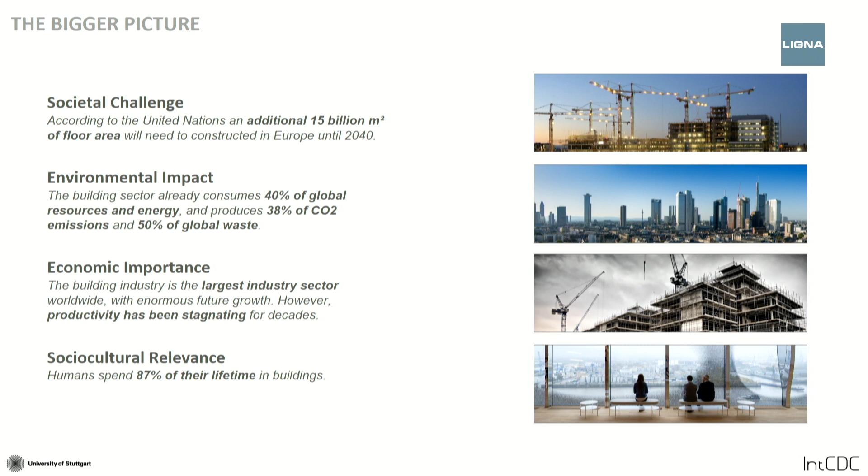In the end, when we talk about construction, we should keep in mind that we're building the world in which we actually live. In the Western world, we spend 87% of our lifetime in buildings. So those are the human artifacts that have the biggest influence on our quality of life, and of course also stay quite long with us. So we should take utmost care to design them with the best possible quality.

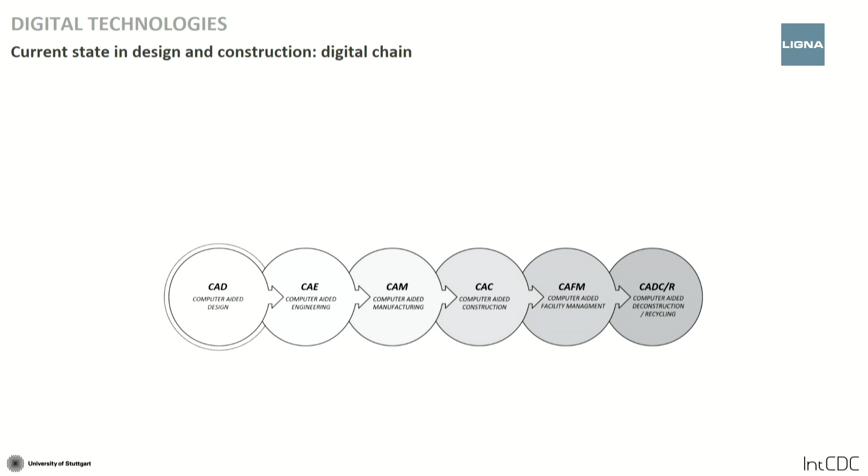Now, of course, timber construction can help address a lot of these challenges, especially if combined with digital technologies. So how do we deal with digital technologies right now? I think what we all aim at is a kind of digital chain. There's a lot of effort in making sure that data is passed on from one stage of design and construction to the next. But we also have to understand that we are digitalizing design and construction as we have done it in the past.

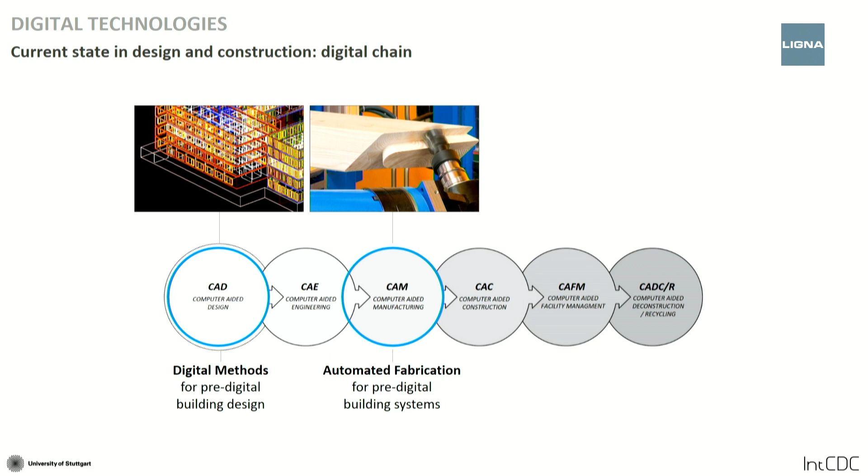If we look at the current digital methods, and of course they're really important, in the end they are digital methods for essentially pre-digital design approaches. Similarly, automated fabrication, and the timber sector is very advanced in this field, is automated fabrication for essentially pre-digital building systems. So one could conclude that the digitalization of pre-digital design and construction approaches means we may not fully tap into the potential of digital technologies. So what could be a way to achieve that in the future?

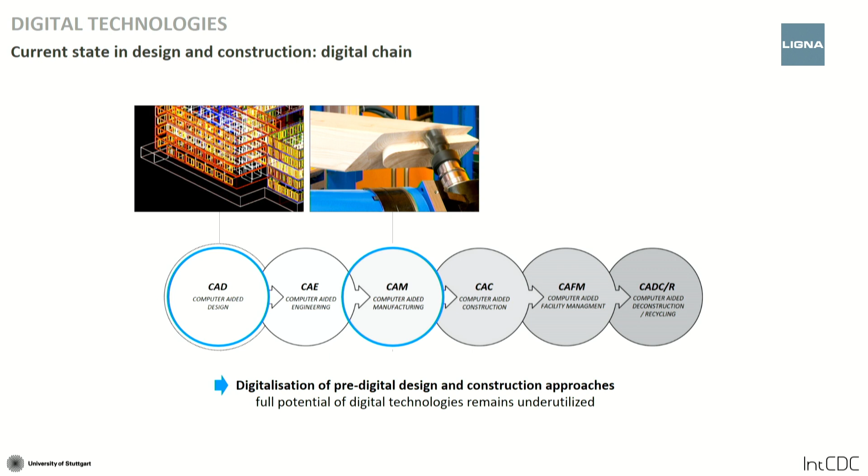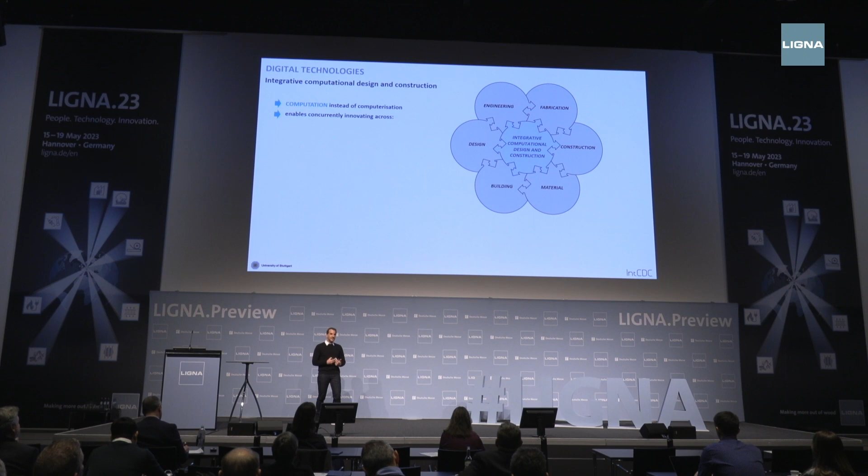This is exactly what we are investigating at the University of Stuttgart, where we think it's not so much about the computerization or digitalization of design and construction as we know it, but about how we deal with computation and artificial intelligence to think about genuinely digital timber construction, enabled by concurrently innovating across various different areas. I think we need to understand that the biggest potential in computation is integration.

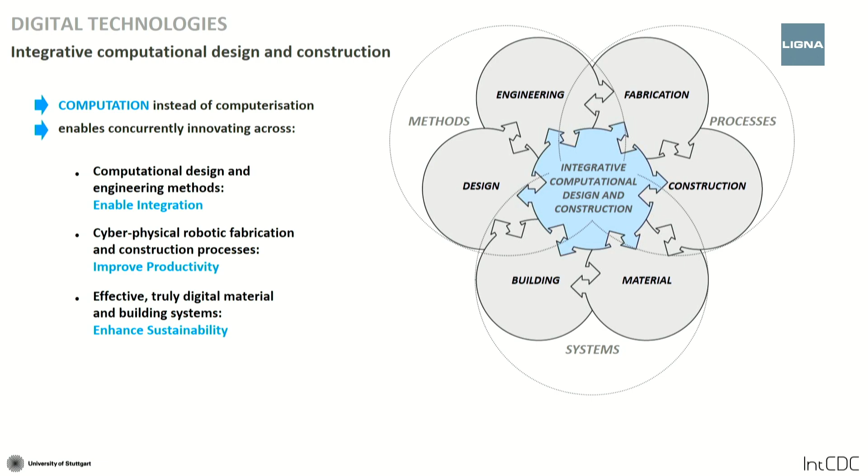The integration of computational design and engineering methods that enable this integration, cyber-physical robotic fabrication and construction processes to deal with the significant productivity challenge in construction, and then using that to develop effective, truly digital material and building systems that enhance sustainability. The most important aspect is that we do all this in feedback with each other, looking at it comprehensively and holistically rather than in the individual bubble. So integrative computation, design, and construction may allow tapping the full potential of digital technologies for truly future-proof construction.

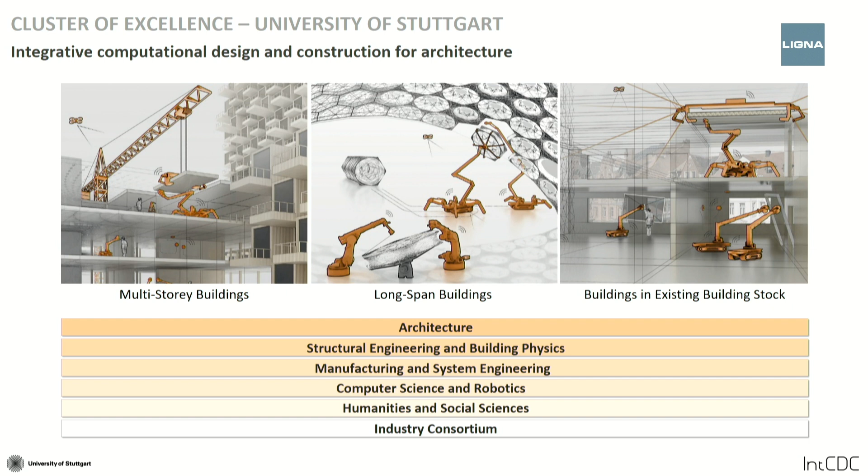And we have that coupled for two-directional knowledge transfer with a large industry consortium. We're trying to tackle these challenges for multi-story buildings, for long-span buildings, and for one aspect that is particularly relevant here in Europe, dealing with and building within the existing building stock.

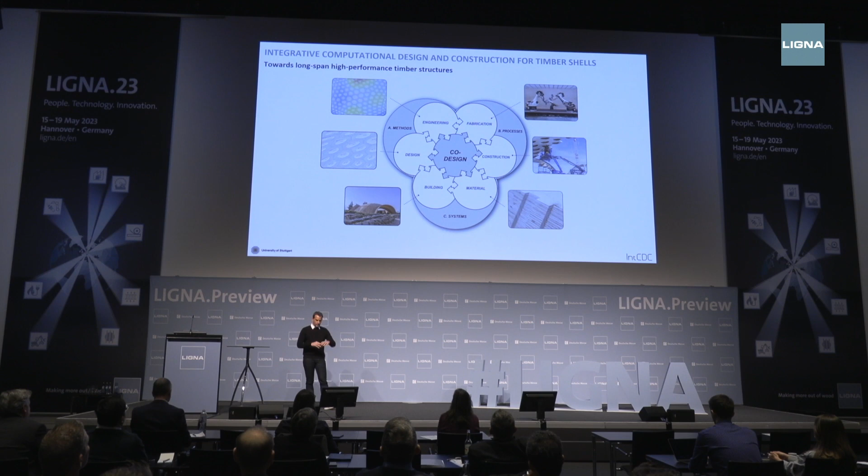So while this whole idea about integration may initially sound a bit academic, by the way, we call this overarching holistic methodology co-design, I thought it may be more interesting for you to just look at a few examples. How can it happen? Because it's already possible. And through that, it may become a bit more tangible.

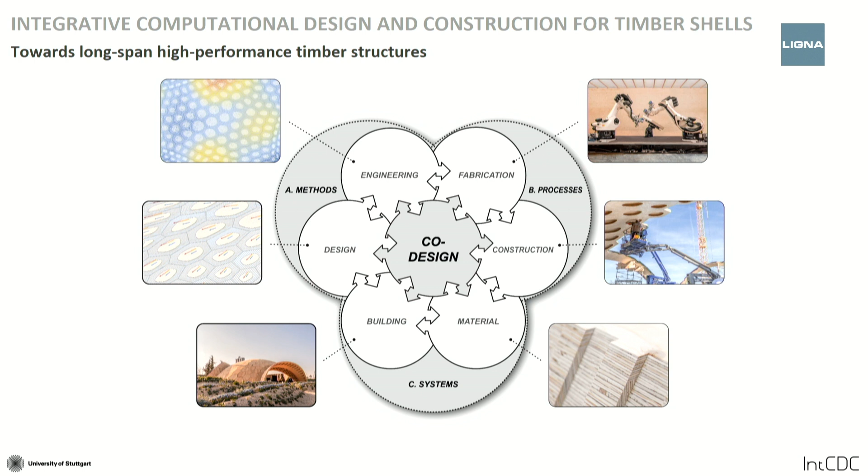So the first example I want to show you is how can we co-design or use integrative computation, design, and construction for high-performance timber structures. So buildings that actually use very little material to actually achieve high structural performance. And I will do this by showing you one of our demonstrator buildings, which is the BUGA Wood Pavilion.

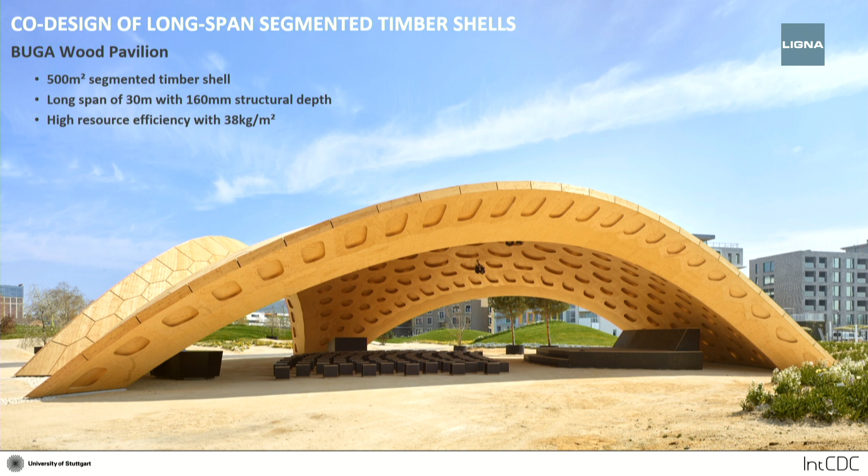It's around 500 square meter shell structure, has a clear span of 30 meters, but only a structural depth of 160 millimeters. So that means it just consumes 38 kilograms of wood per square meter. Everyone that knows what a cubic meter of wood costs, despite recent rises, knows that this is not an expensive building. How is that possible?

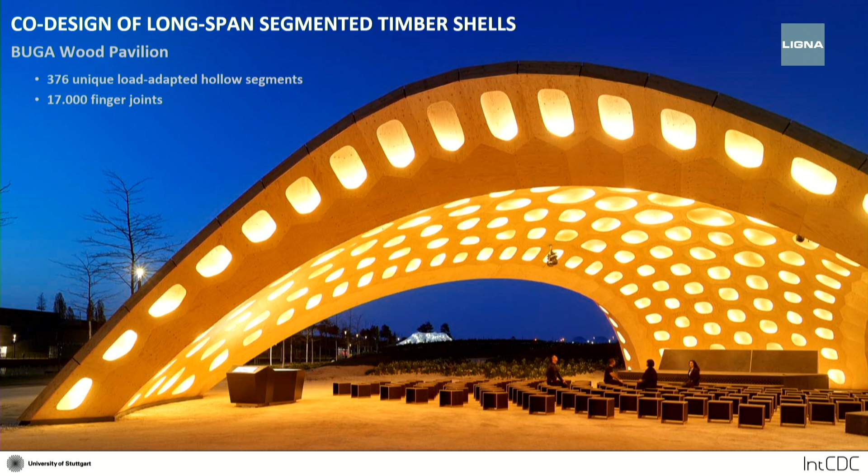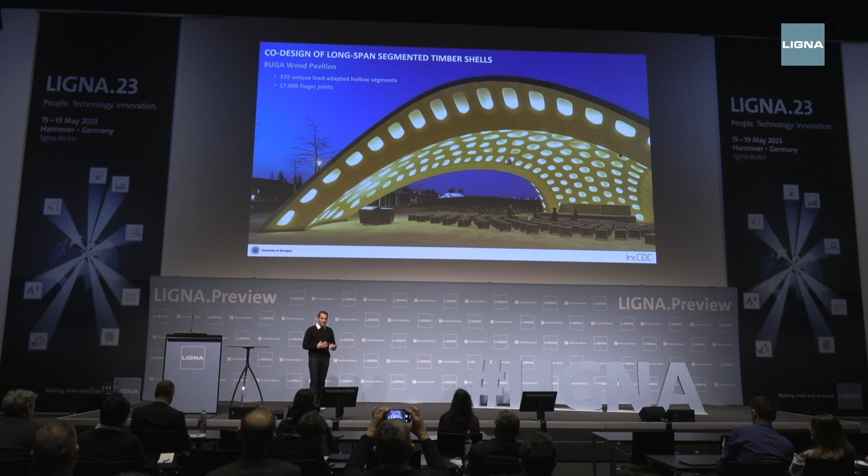It's possible because we tune every single part to be designed to exactly meet its performance requirement. So all the parts are different, because only with that level of differentiation you can get that level of performance. And that means here we're looking at almost 380 of those roof components that make up the shell, and they all have different joints, so it's a large number of different elements.

So here you can see how this whole structure is built up. It's actually made from individual pieces, and the pieces are again made from a lot of complex pieces that are all different. Overall, more than 20,000 different elements.

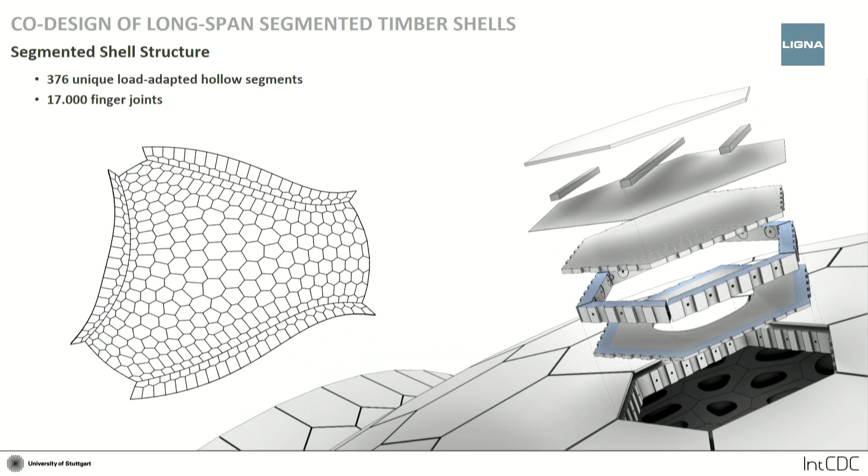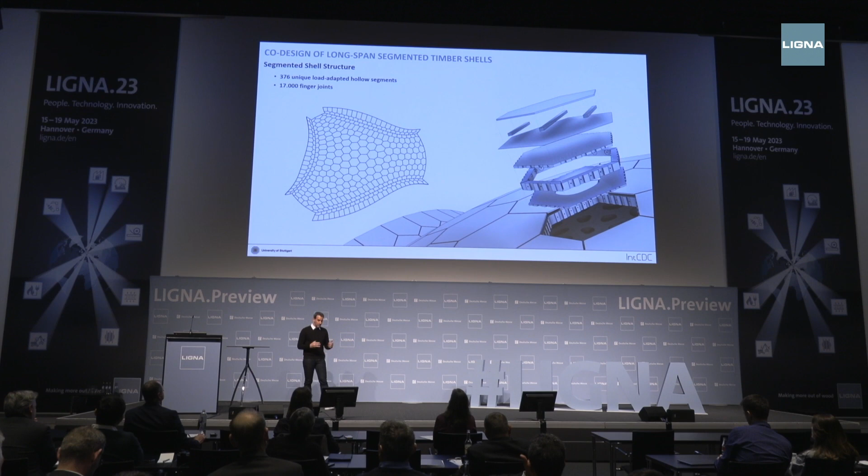And the interesting part is that this is a bit questioning the typical economy of construction. We're used to an economy of construction where the repetition of the same parts means that we may invest a bit more into the material, but on the other hand, it's cheaper to build. And I think in recent times we have experienced that all of a sudden energy and materials and labor become expensive. So we may actually look into ways of how we can reduce the consumption of energy and materials by having a higher level of complexity in the structures.

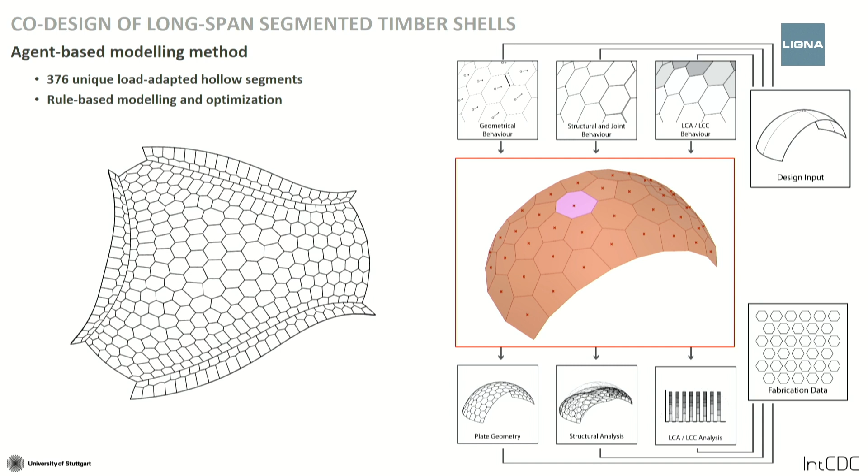That is possible through digital technologies, because we have developed algorithms that can deal with this individuality of the elements, so they all follow the same rule, but they're all different. And at any moment in time, we know what kind of impact they have economically and environmentally, because they're part of one integrative workflow. For this building, that means we don't model any of these parts.

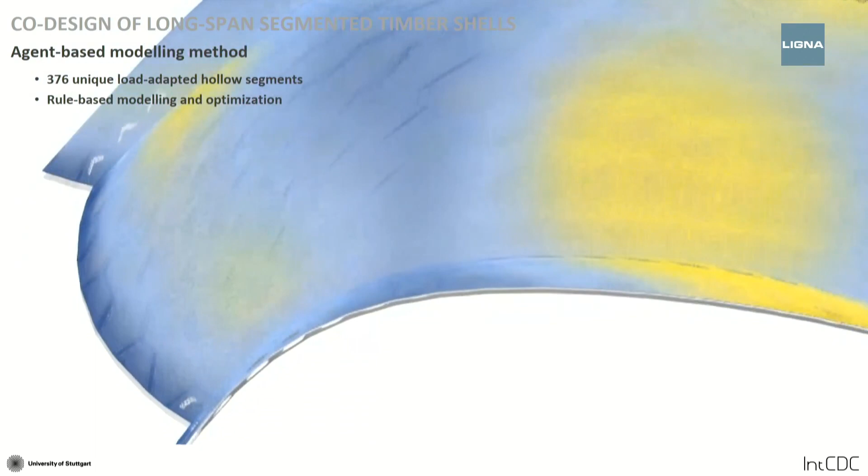They're actually generated, and in the generation, every single element is already included. So it's not different levels of details. Every bolt is in there from the beginning. And it's actually existing in the feedback with structural analysis, life cycle analysis, and all these aspects. And here you can see that the buildings follow rules how to find the location in which they perform best.

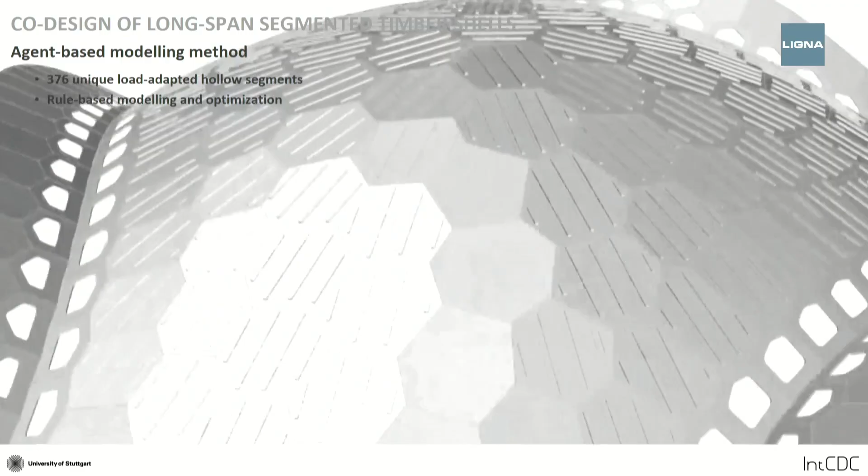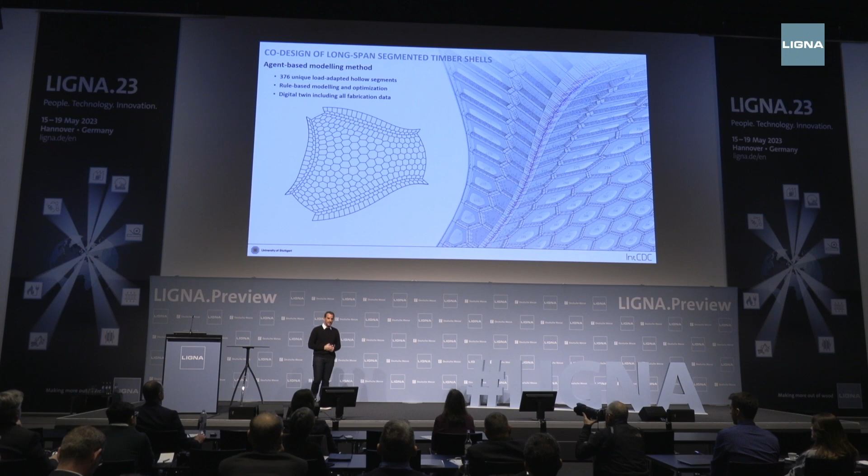That means we get for free a digital twin that includes also, of course, all fabrication data. In fact, what you see here, we don't need, really. That's just a geometric representation that we as architects feel quite dear to, but we could directly communicate from the algorithm to the machine. And for that, in order to really tap that potential, we also need to think about the co-design of the prefabrication process with the actual design methods.

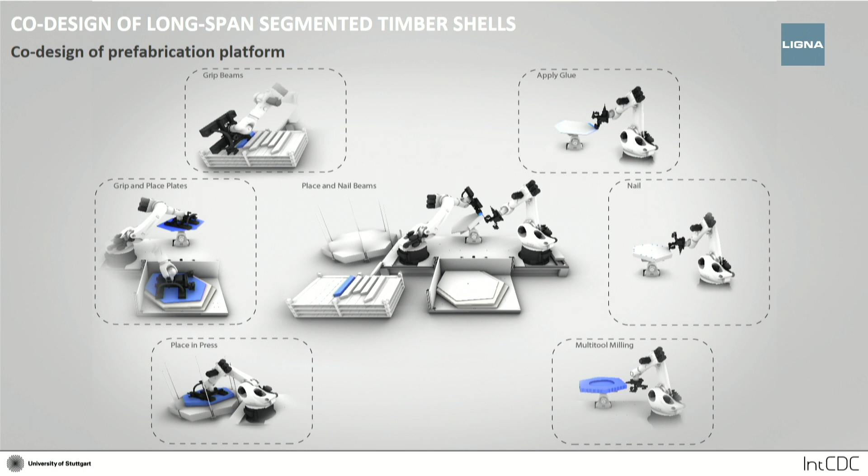So what we've developed for this project is to say, okay, we want to have one manufacturing unit that is designed with the building that just produces the building for us. And that's possible with an actually incredibly small footprint and also quite a low investment. So what we developed is this robotic fabrication platform that can produce the entire building, and it's incredibly compact. So it fits onto a 20-foot container.

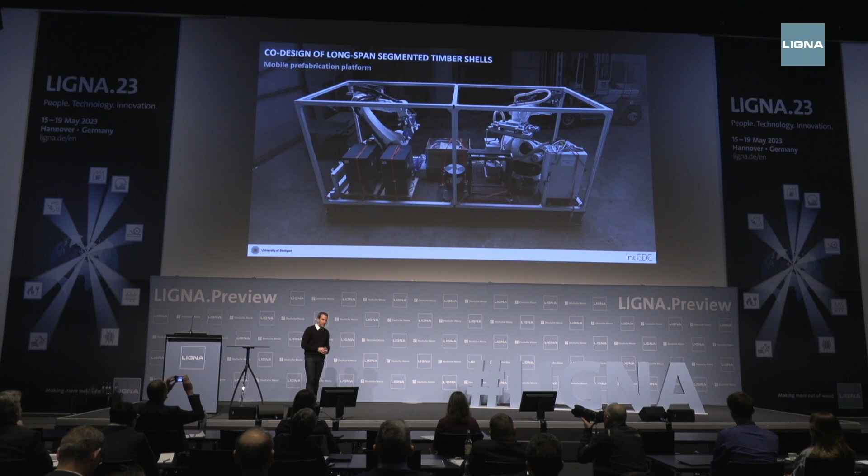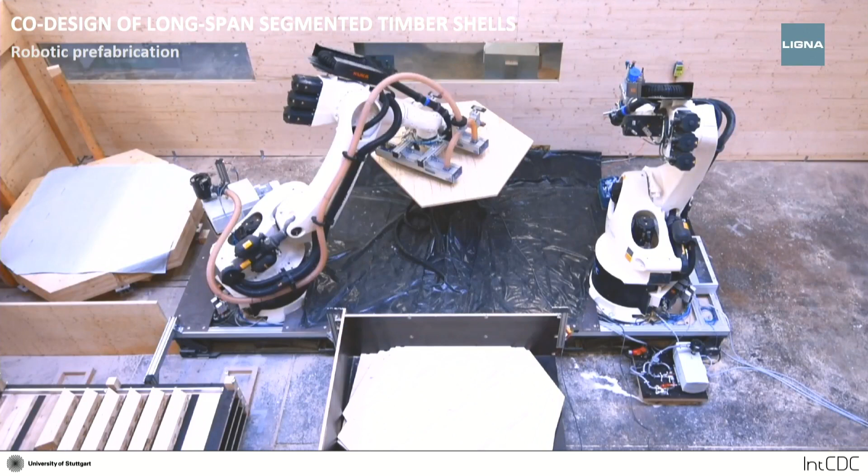It's actually mobile. It's registered as a container, so you can ship it anywhere on the back of a lorry or by ship, and it can produce everything. Here you can see the transportability, and we brought it to the site, actually to a local timber manufacturer, and it produces all the elements in a fully automated way. No prototype, by the way. First element ends up in the building. So how does that happen? I will explain the production process in a second.

So the robot picks the bottom plate, mounts it onto the turntable on a vacuum gripper, applies the glue, puts on the rim beam, secures the rim beam with wooden nails to make sure it remains fully monomaterial, then applies the glue on the top, adds the top plate, and puts it in the press. Takes about 7 minutes per element. Every element is different. Every component is different. It's all run with one control algorithm that can deal with this level of non-repeatability.

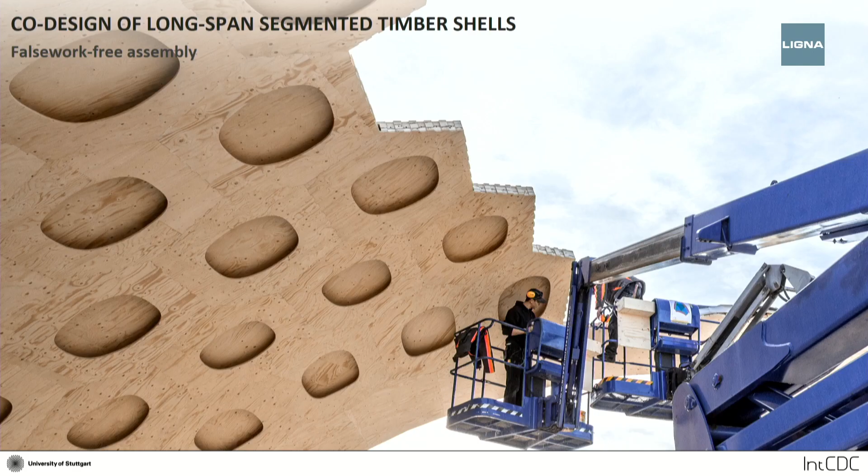And you get an incredibly high level of precision. So once these elements come back, they're actually milled on the same platform with an accuracy of 0.35 millimeters. And that's, of course, important because this extremely high level of precision means you can build up your system like a three-dimensional puzzle in space. No scaffolding, no falsework, none of all these other incredibly costly and labor-intense processes that are typically related to shell buildings, which meant actually that they disappeared from construction.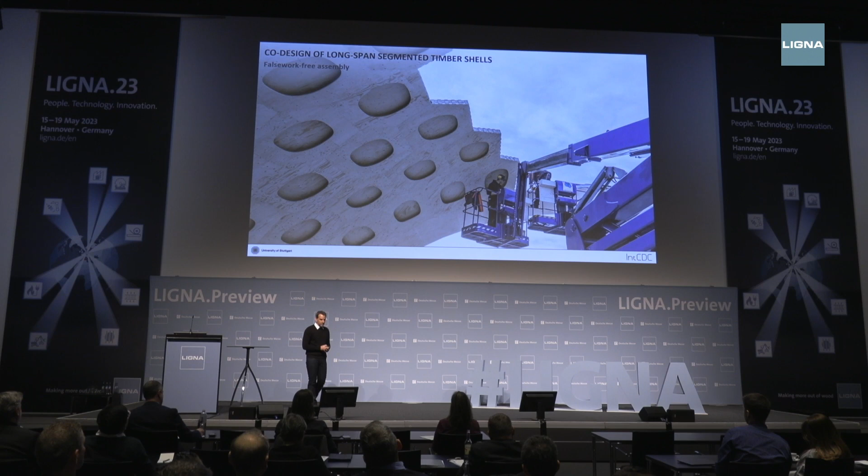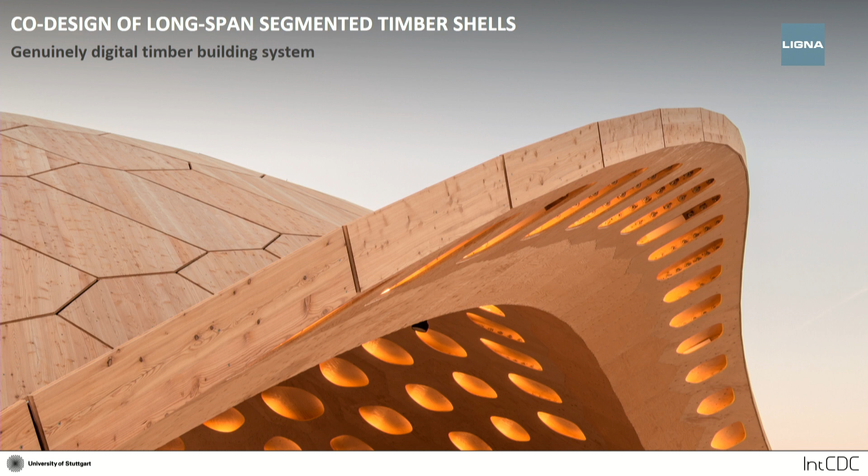And what is also important, of course, is that you have a different way of dealing with tolerances. There are none, and there cannot be any. So the last piece needs to fit. And it did. So I think what we are seeing here is a genuinely digital timber building system. That's why I wanted to show you this example.

It's something that couldn't have been designed, it couldn't have been built a few years ago, especially not in the incredibly strict timeline of this building. So this was actually contracted, delivered, and the building opened within 13 months, yeah? Including everything. The design and development of the robotic fab platform, the certification process that is required for robotic gluing, everything. So innovation is possible also on fast track.

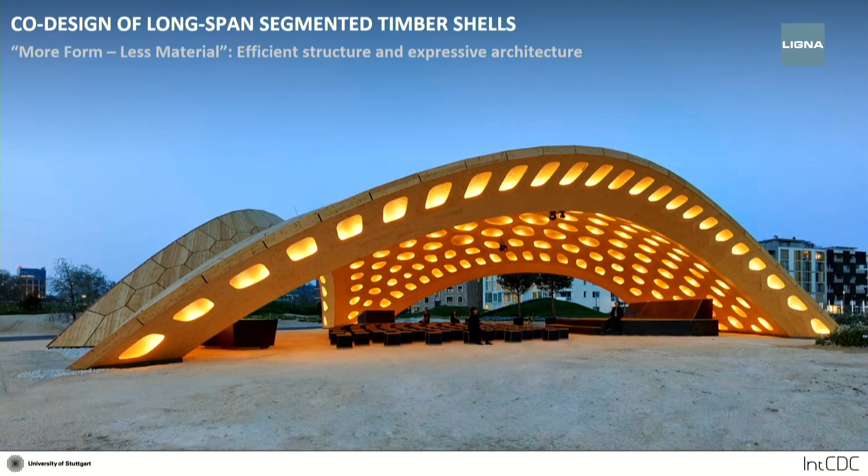So I think it's also a good example of how the economy of building may change to something where you say, okay, I invest more into the form, and by that, I use less material, need to consume less energy. And that means we get an efficient structure, and in this case, if we do it carefully, also quite an expressive architecture, which for this building was a unique selling point because it was used by 2 million people as an event space, and it actually offered such a high quality of both spatial atmosphere and acoustics that there were a lot of live TV shows actually being done in this building.

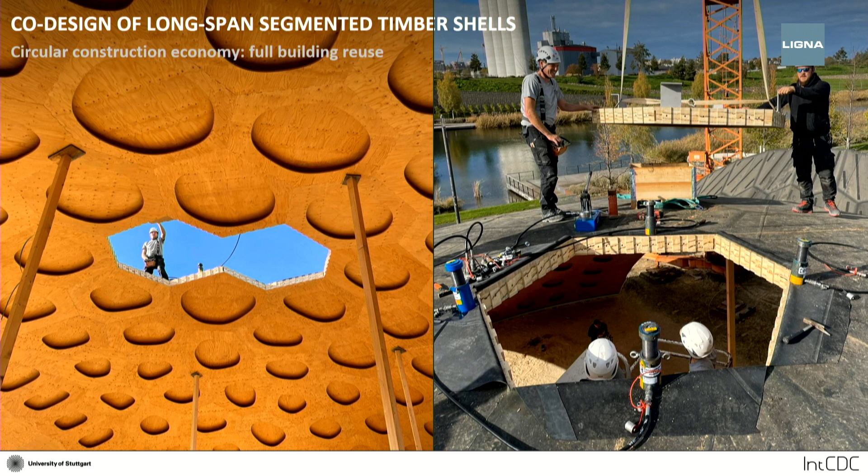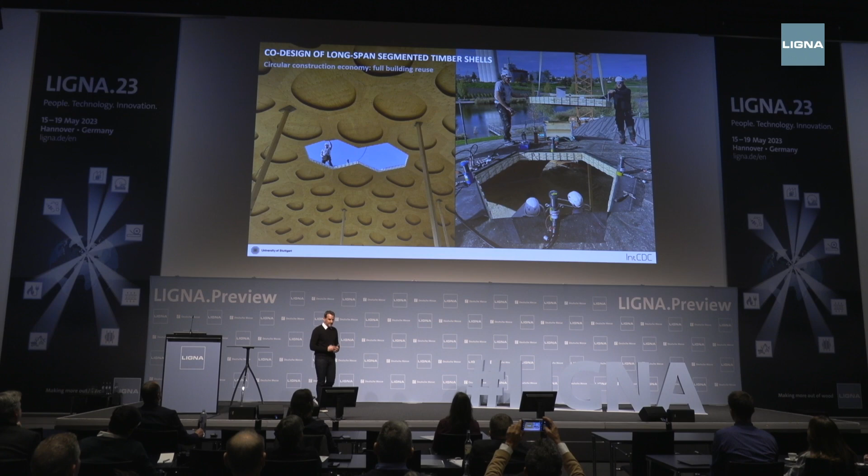What is also important to say is that this building was from day one designed to be a circular building. Yeah? So you don't reuse parts, you reuse the whole building. Because this particular event architecture is actually taken down after 3 years and moves to another site. And it can do so by reusing all the parts. Not a single part is actually wasted. And I'm not just talking about the timber. I'm also talking about the cladding, I'm talking about the waterproofing, I'm talking about everything.

And it will do so again after the end of its lifespan at the next site, and it will eventually become a permanent building. So here you can see this process of taking it down again. Of course, there were a lot of worries. Okay, you may get the one last piece in, but you will never, ever get it out again. It took 10 minutes with these hydraulic stamps. So no worries on that side.

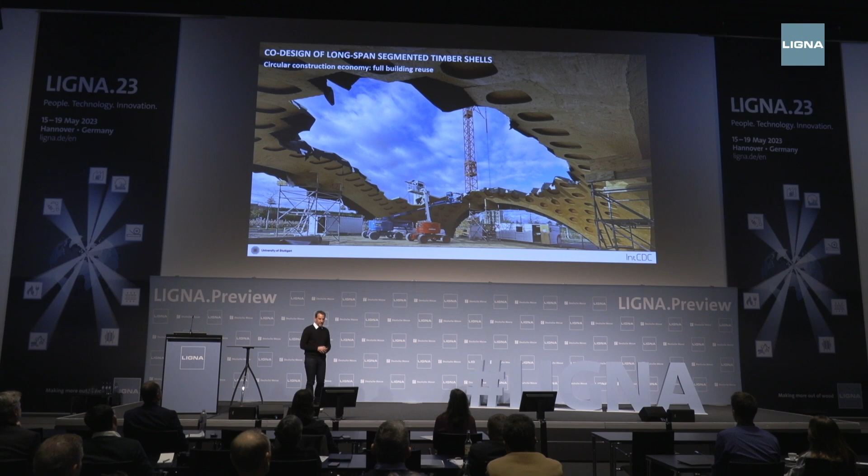And here you can see how this was actually all taken down. There's no glue in the structure. Nothing is actually permanently fixed. The connections are bolted, so it can just be removed. By the way, it took 8 days for 2 people to build that structure, and it took about the same time to actually take it down.

Of course, we're now looking at what are the next stages in this development. If we deal with lightweight structures, we can also think about robotic assembly. So we're developing automated assembly robots that you can see here that can actually erect such a shell. That means one robot puts the building component in place, and the other robot actually puts the bolts or screws in. This is something we have actually ready to be used.

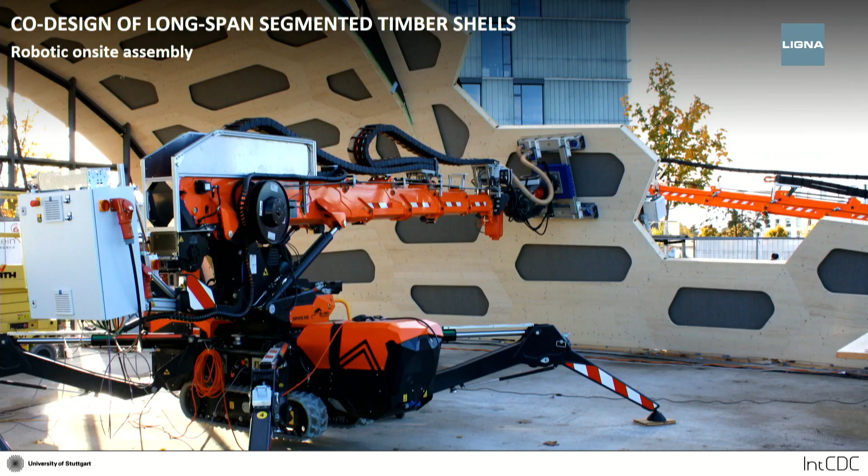So here you can see that, by the way, it's sort of run-of-the-mill hardware, but then it's actually equipped to become autonomous just by specific control engineering pieces that are added. So this is the first time we use that in construction, actually, for a building that we're currently finishing for the University of Freiburg, which is this dome structure that they use as a kind of ideas lab for their researchers.

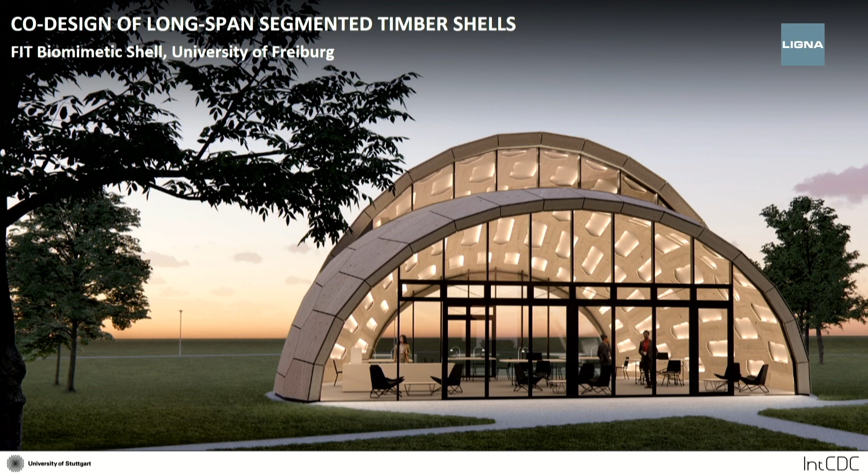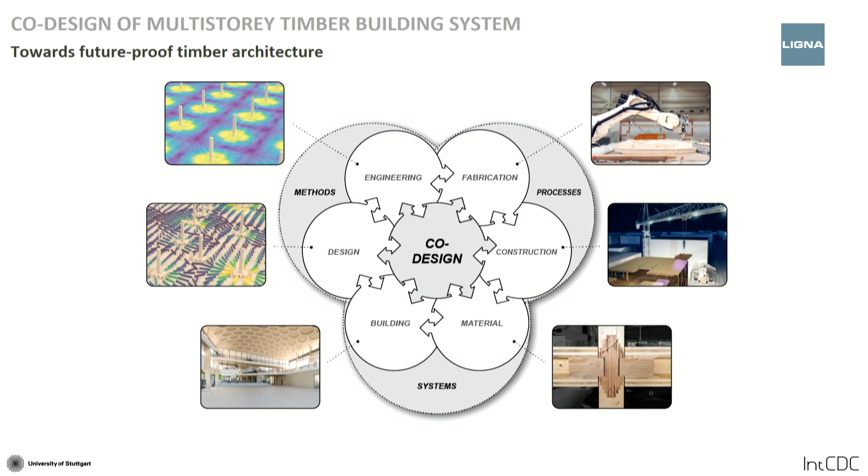So of course, shell structures are interesting. They show the, let's say, performance capacity, but what we really need is multi-story timber buildings if you want to tackle the challenge of timber construction. And in the next example, I want to show you how we managed to transfer the same principles to, of course, what is the dominant building type in construction.

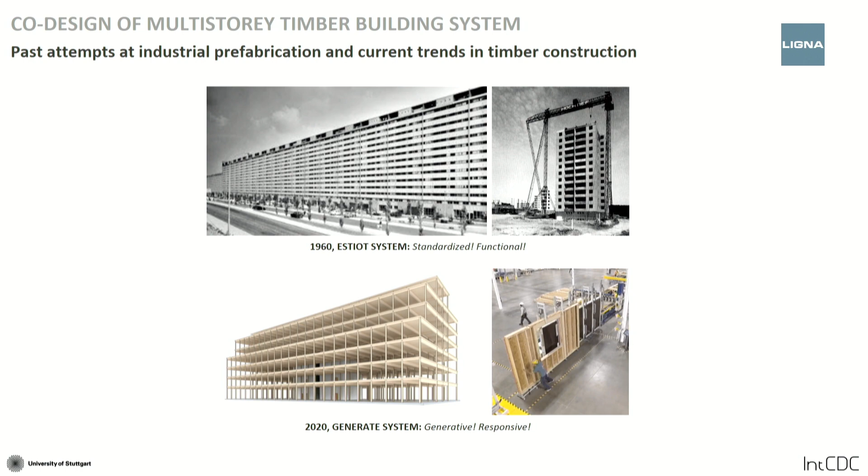So just a quick look, and I think it's interesting if you look at past attempts at industrial prefabrication and current trends in timber construction, we can see some similarities. It's not the first time that we're trying to industrialize construction. It has already been done in the 60s. Here we see the Estiot system. It was actually partially automated on-site assembly of prefabricated concrete.

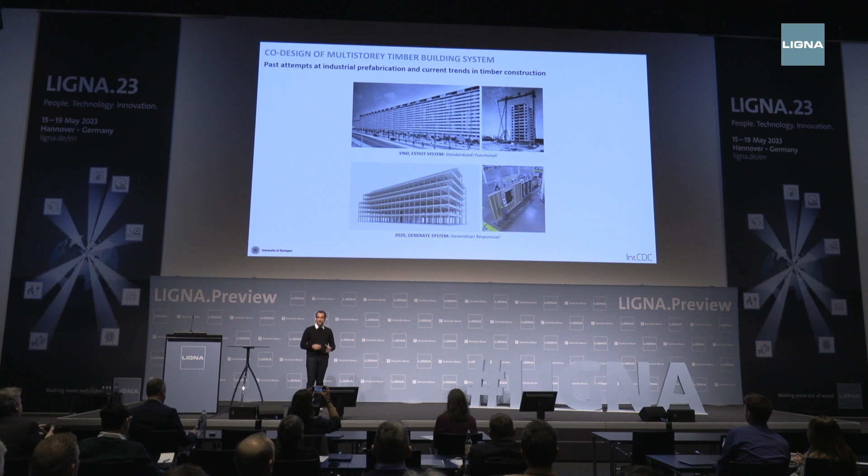And I think what is interesting is that we see in a lot of current attempts at serial timber construction very similar, let's say, architectural configurations, which may offer also some food for thought of whether this is really the quality of the product that we need to be ultimately competitive.

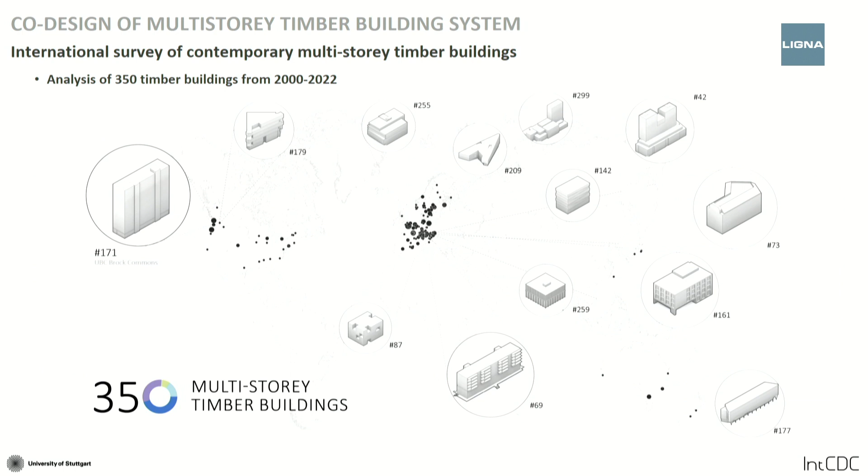So what we did is we analyzed 350 timber buildings in a long study, a 3-year study, buildings that were constructed from 2000 to 2022. And we analyzed them very carefully, the underlying grids, the way they work as a structure, the materials from which they're constructed, down to the last nut and bolt.

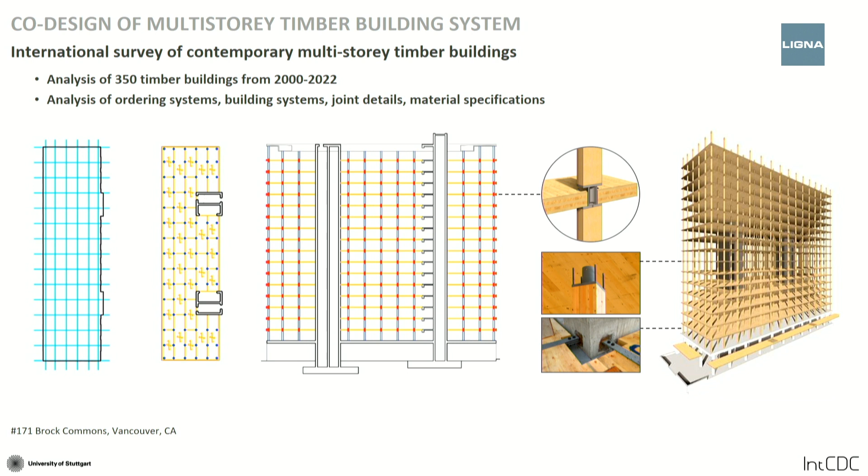And the result is interesting because we can see that almost 99% of those built timber building systems are, of course, based on regular and very rigid grids. So it's actually very difficult to make them fit on a complex urban site, and we need urban construction. We can also see that timber construction, 98%, has single spans. Single span means that a slab can only span in one direction. Concrete can span in 2 directions, which means you have actually very limited design freedom compared to, for example, concrete.

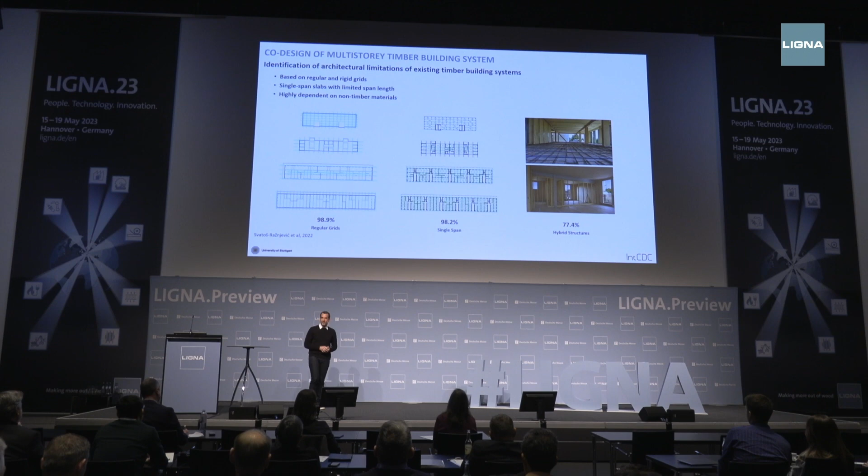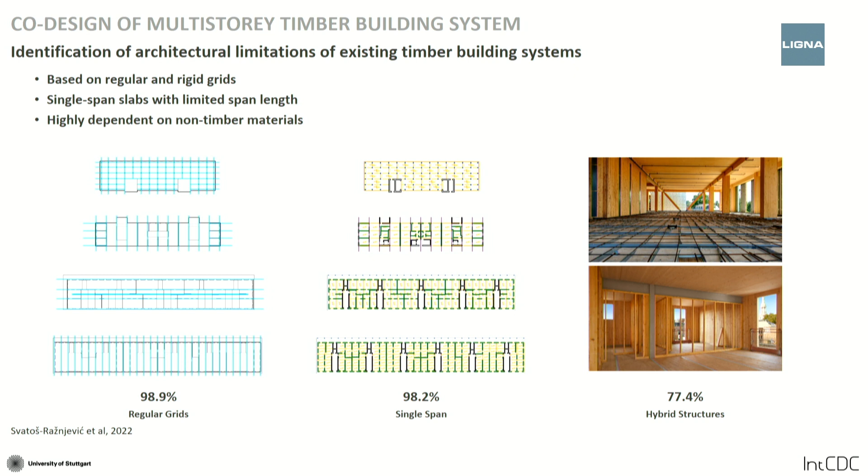And 3/4 of the so-called timber buildings were in fact timber steel or timber concrete hybrid structures. So not really fully timber. So what is interesting is that that means we still have quite some architectural limitations in existing timber building systems, and we need to be careful that that does not lead to the spatial monotony we know from concrete prefab.

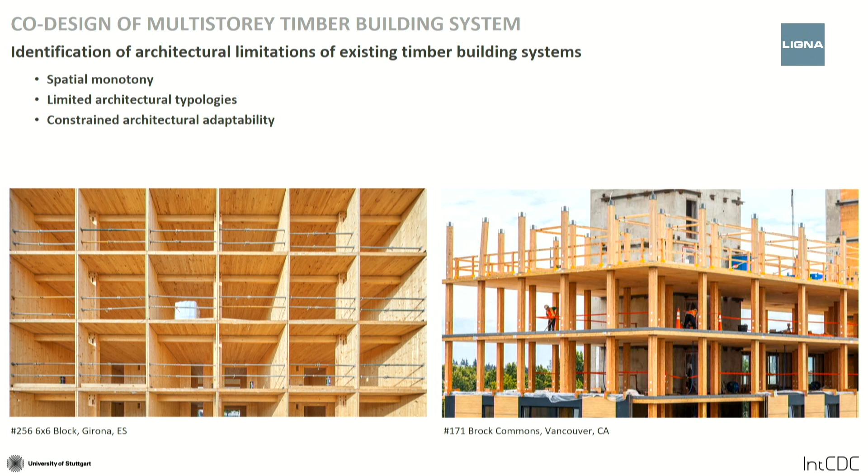We need to make sure that we don't get limited architectural typologies, and that's the most important part, that we don't constrain future adaptability. Because a timber building is really beneficial if it's with us for a long time, but that may also mean that the use may change, because how do we know? We basically don't know for what kind of society we're designing.

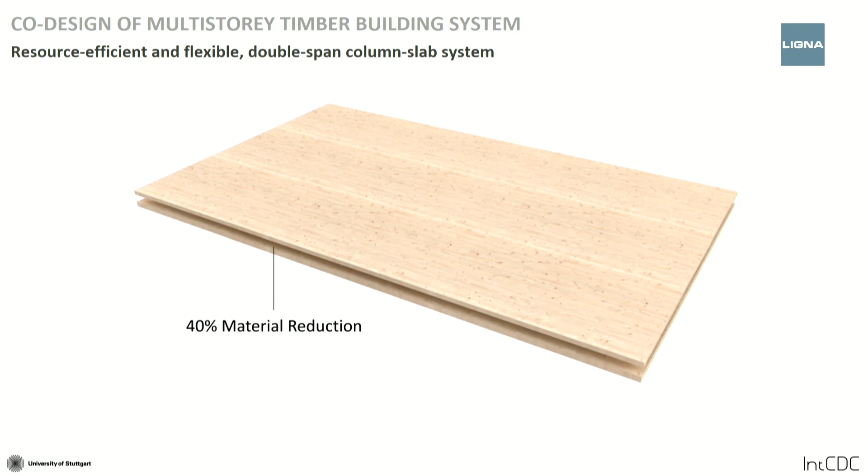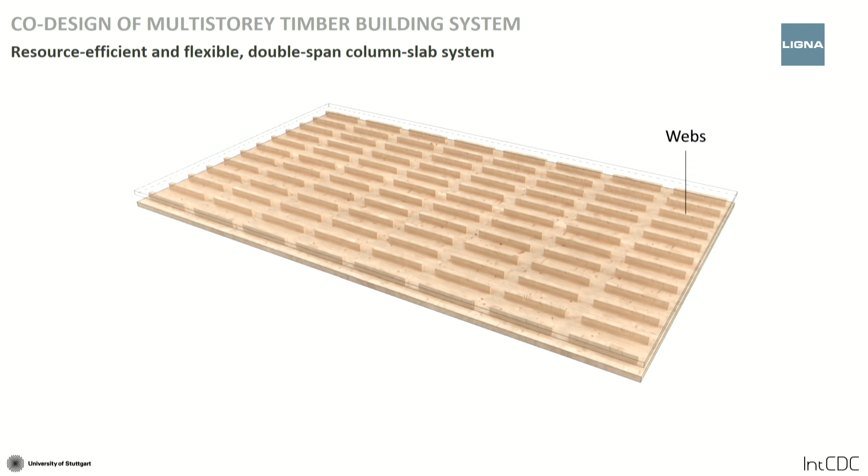So what we have done is we have developed a prototype for a multi-story timber system trying to deal with the challenges. First, we don't have a solid timber system, we have a hollow timber system, which means already 40% material reduction. This is possible because we have 2 separate plates, actually fairly thin plates that are equipped with internal shear webs that you can see here, so small beams that connect the plates.

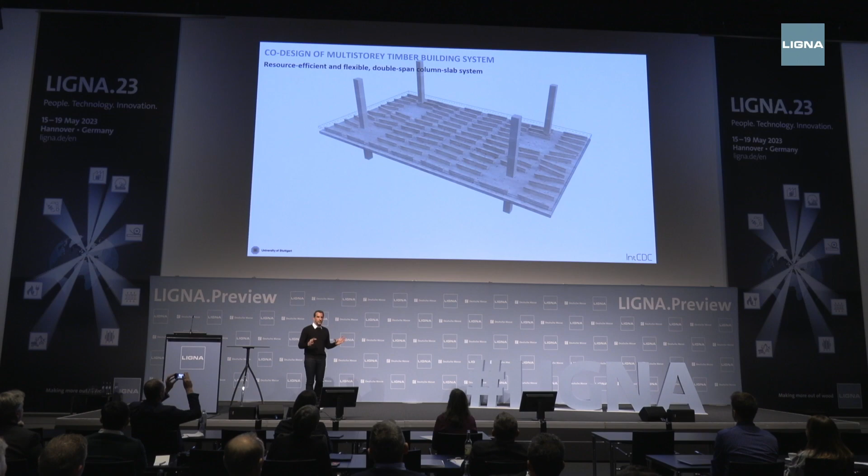And this system was from the beginning designed to be a point-supported structure, so a skeleton. No load-bearing walls, just timber columns, timber slabs for maximum future adaptability.

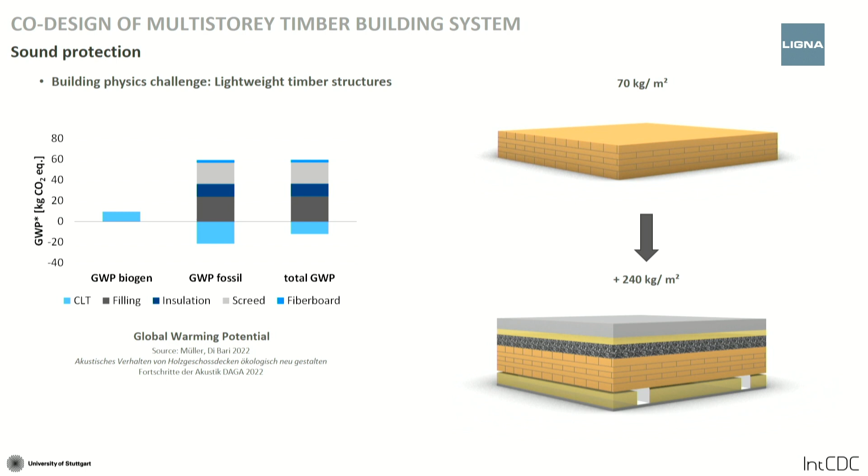Then, of course, we have a lightweight system, and everyone that has a little bit of knowledge about timber construction will say, okay, we have building physics problems. So one of the biggest challenges is, of course, sound protection for lightweight timber structures. That typically means we have our timber structure, very lightweight, let's say 70 kilograms per square meter, and then we put all kinds of stuff on it, below it, on top of it. In this case here, 7 to 10 centimeters of cement. So we compromise a bit the resource efficiency and sustainability of the system, as you can see in the global warming potential readout on the left.

We were wondering, are there not different approaches where we can address, for example, just as an example, the acoustic challenges with an integrated solution? So we just said, okay, we have those beams anyways. They are required to structurally couple the upper and the lower plate. And of course, in a standard construction, they would also mean that they're acoustically coupled. So why can we not find a way to use digital simulation to tune these elements so that they offer structural coupling, but acoustical decoupling?

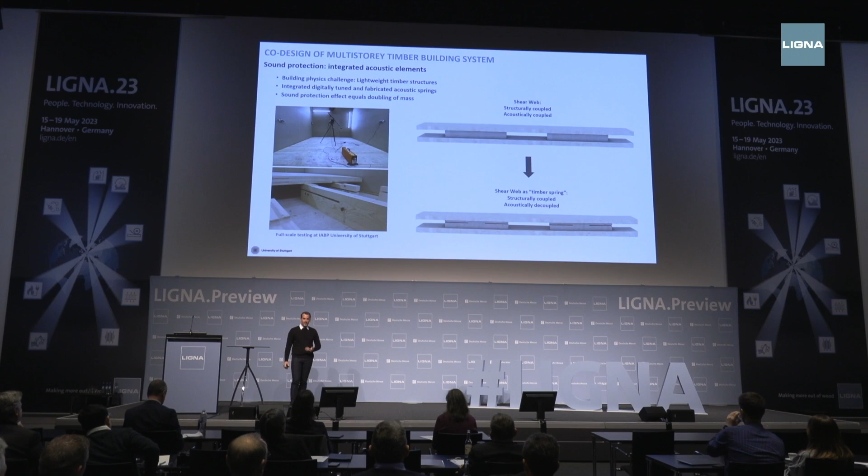Turns out to be fairly simple. You just need these slits, and then actually the beams work as springs acoustically, and they can be tuned like an instrument through digital simulation, and the sound protection effect that this offers equals the doubling of mass. Yeah? So it's not insignificant. It's actually what you need to actually get away with this in a German context.

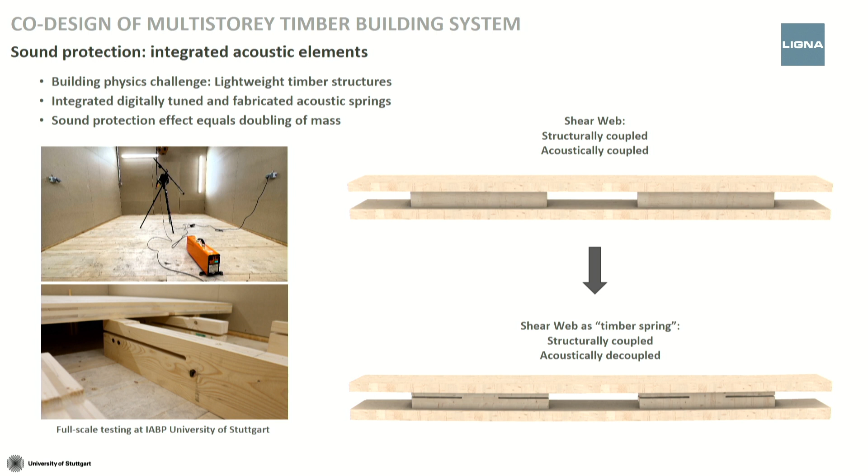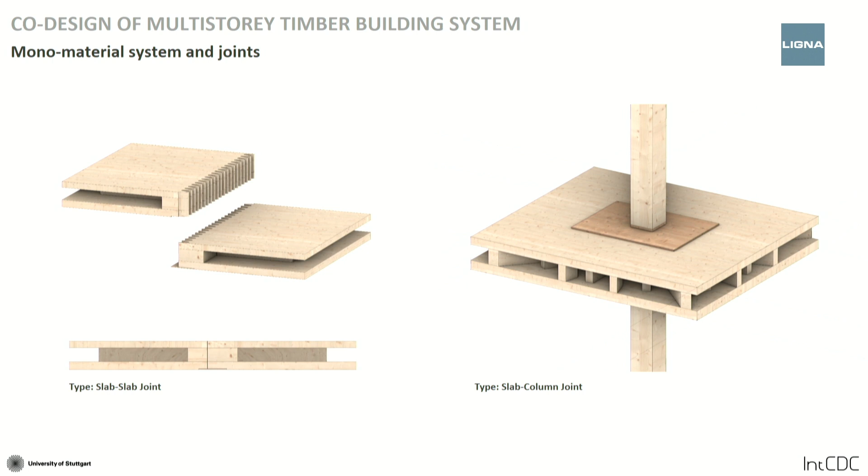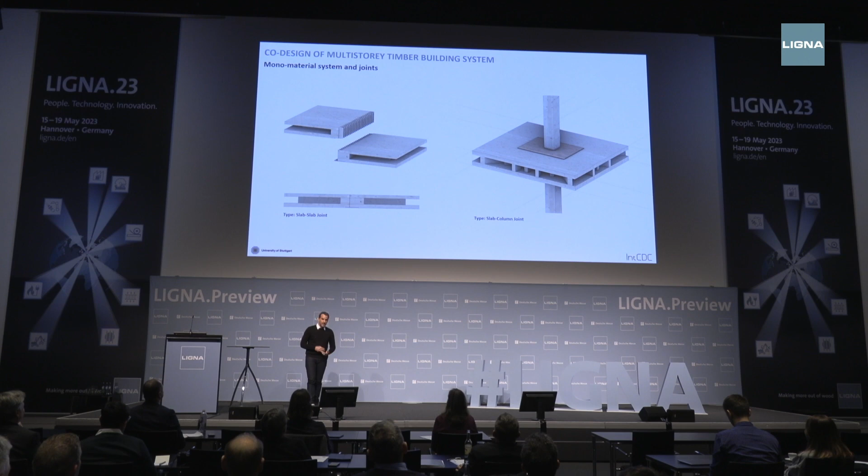Similarly, of course, we said if we go for a timber system, we want to have a monomaterial system. So no metal, no additional materials. So all the connections are monomaterial, which you can see here for this typical slab-to-slab joint, which is, again, finger-jointed, mega finger joints, and the column head, which is typically the critical area. Don't want to get too much into the technical details,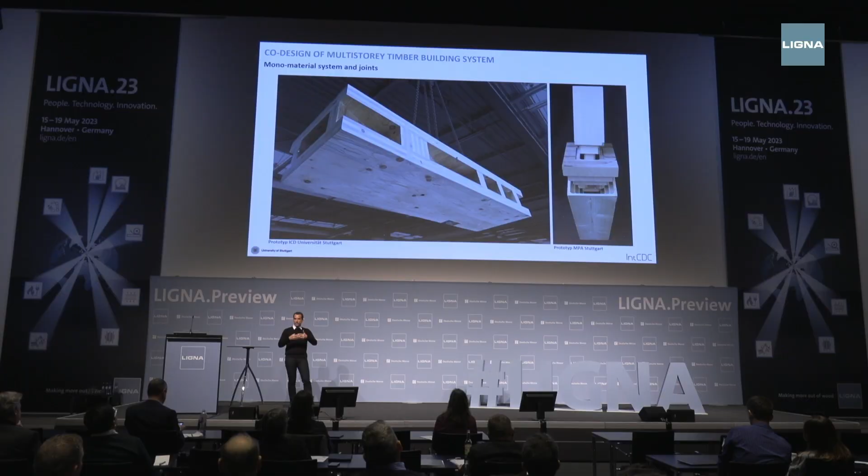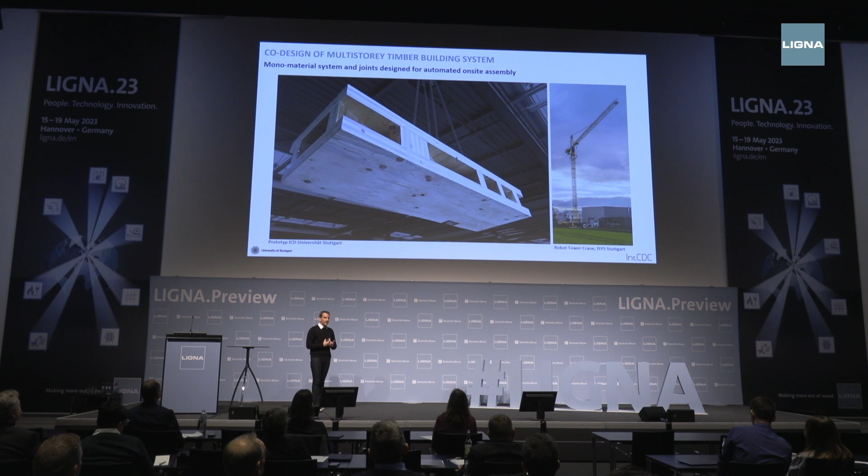but one aspect that's important is that this was also, from the beginning, designed. Here you can see the prototypes of these two monomaterial solutions. So it's a hardwood, softwood combination. It was designed from the beginning for actually automated assembly. Yeah? Because those finger joints need to be fairly precisely assembled on site. And we do this because we also look at larger scale construction equipment, and we have this robot tower crane that can actually very precisely deliver parts from point A to point B, actually with centimeter precision.

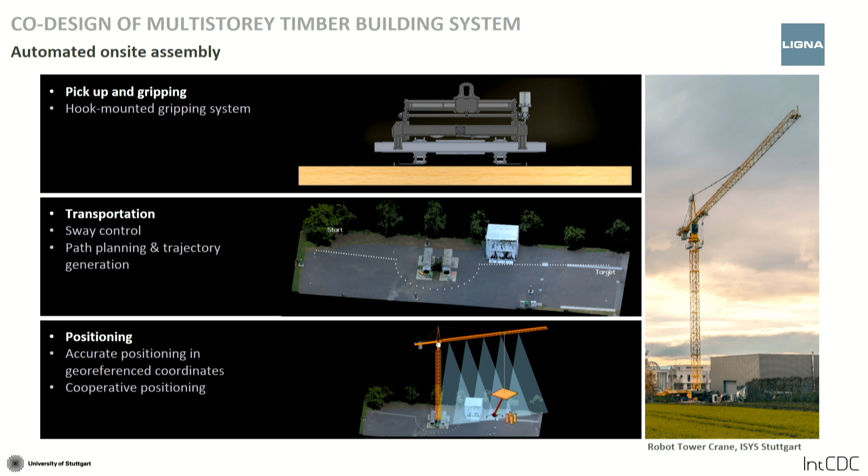So there's a threefold approach to that. We have research on picking and gripping the element, which means we can position it very precisely. We have fully automated transportation, including sway control. So the parts actually can be positioned within centimeter correctness. And we have the possibility to collaborate, for example, with the aforementioned spider cranes when it comes, for example, to putting the screws in for the ground-based work that can happen in a larger cyber-physical construction system together with this robot tower crane.

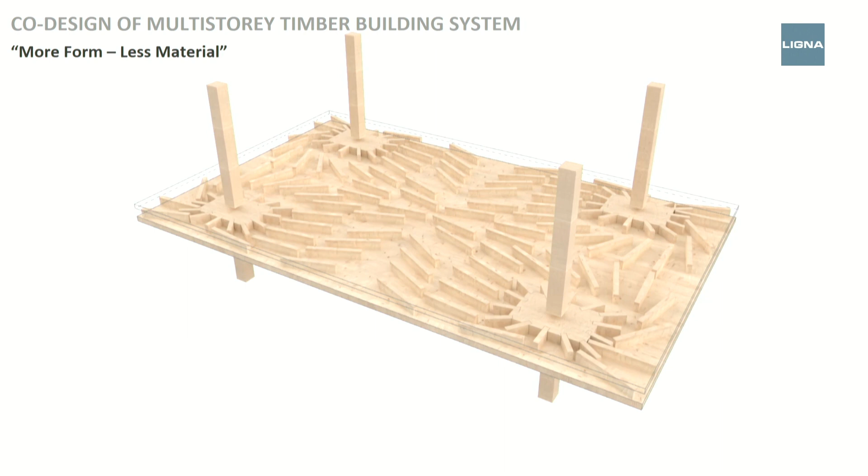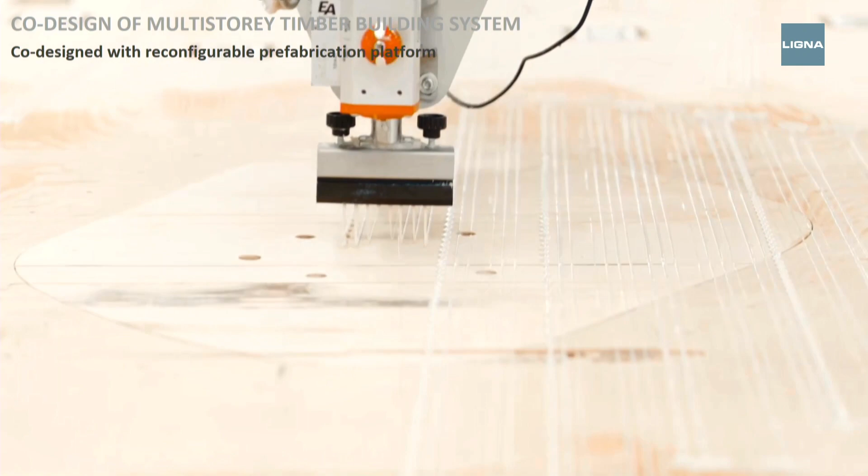Again, it seems to be more effort, more form, but it means less material. And again, this can be compensated for by a fully integrated digital fabrication workflow. So we have developed a prefabrication factory that can produce these pieces fully automated, as you can see here. So what is perceived as complexity is actually just dealt with by the digital technologies.

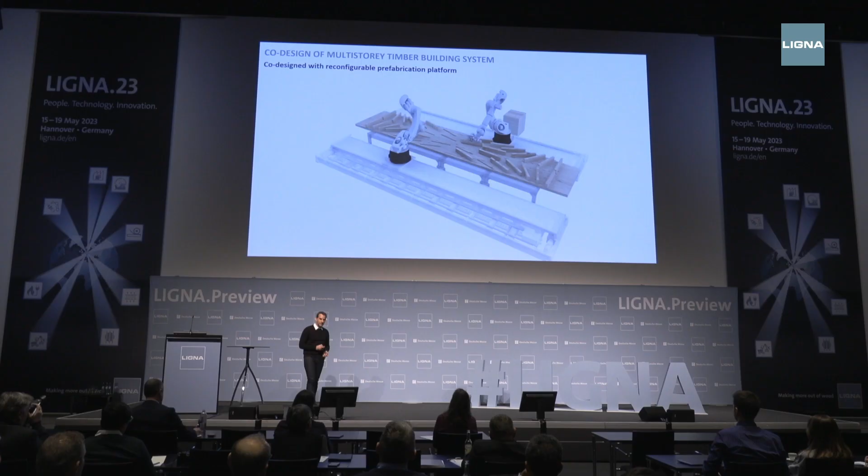This is the prefabrication platform that we have. So it's a kind of further development of what I showed you before. It's a couple of 40-foot containers now. Again, they are certified to be road legal, so you can bring them anywhere. And these platforms can actually build the multi-story timber system in a fully integrated way.

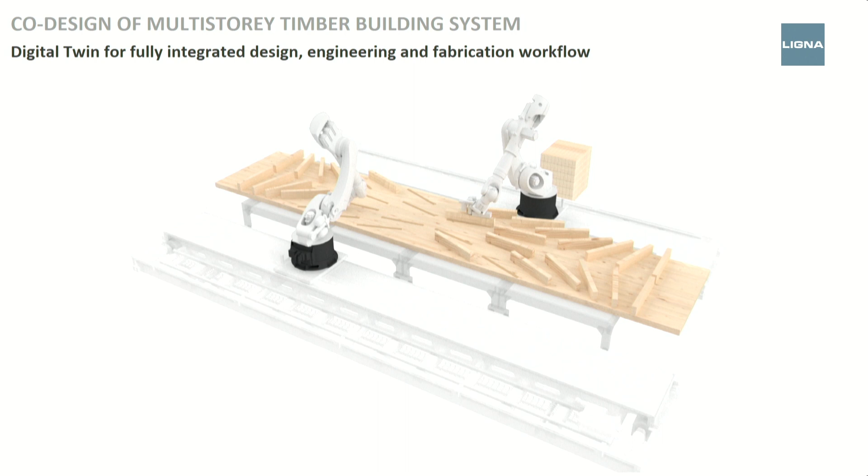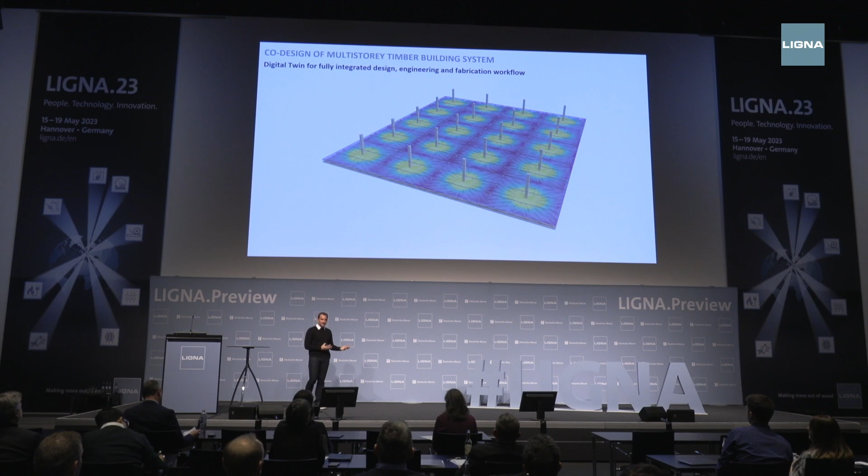So of course, the important part is that we have a digital twin that allows for an integrated design and engineering workflow. So again, the complexity of what is required to design such a building is assisted by the computer. No one wants to deal with thousands of oddly shaped components. Here, even the layout is optimized. You get an optimized joint distribution.

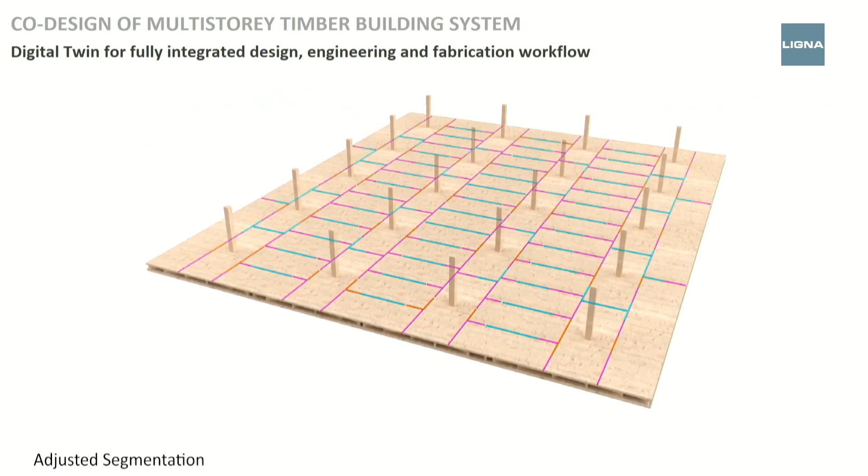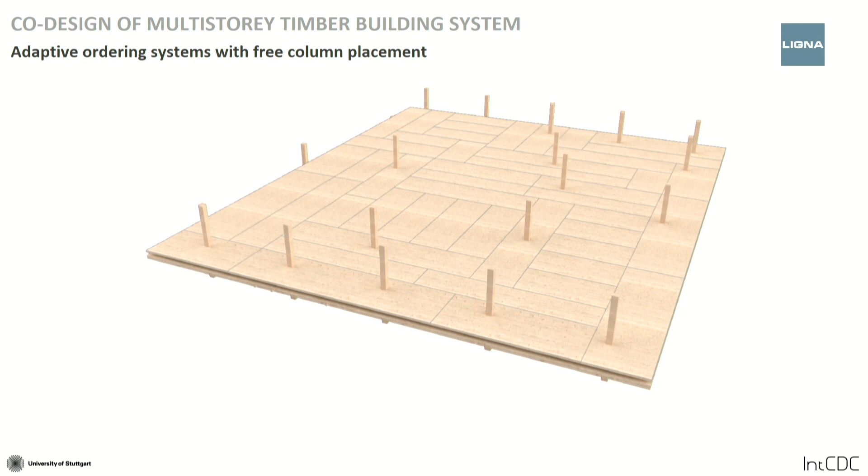And in the end, all this means that we have a double span slab, and we can position the columns wherever we want. So no grid required anymore. You move the columns around. You actually have the design freedom that concrete structures offer. And that means that we have a system that can actually be used in the complex urban sites that we usually face when we talk about inner city timber structures.

So in summary, what this system offers is long span slabs, 11 meters clear span, almost twice as much as you get in your typical timber structure, with a flat ceiling. Of course, you want to have a flat ceiling because you want to put your partition walls wherever you want. So the goal is to have this for a 150-year lifespan, so you don't want to overly constrain that by having, for example, beams or anything.

Second, of course, you need to have a shallow depth. In this case, 11-meter span equals 42 centimeters with integrated acoustics and with all the design freedom that typically only concrete structures offer.

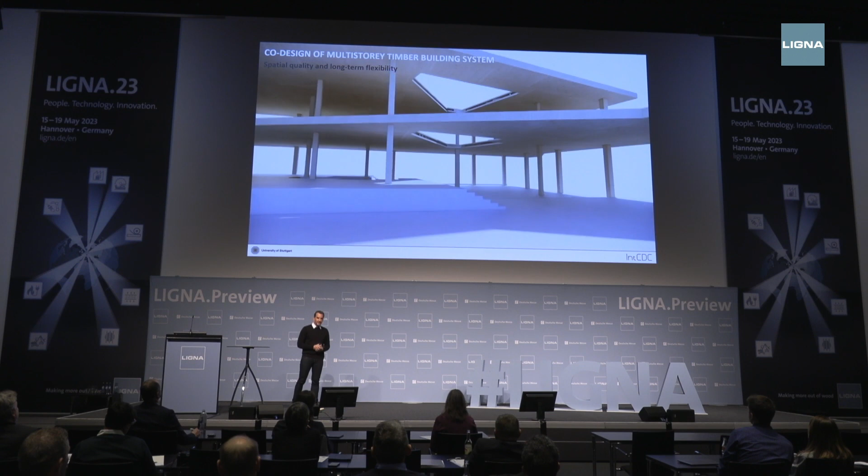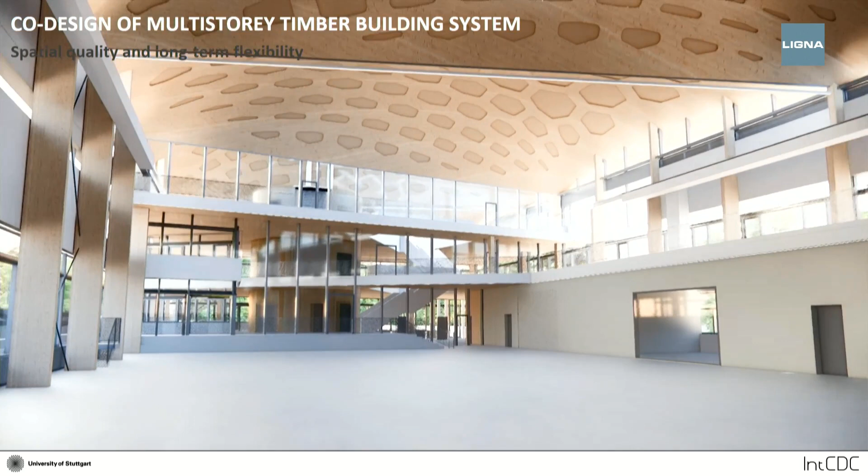I think what is important to say is that we take the research quite seriously. So we also say, of course, we want to include building a building in the research, and this is what we're currently doing at the University of Stuttgart, what you see here. This is the building that we're constructing for our cluster of excellence, as I showed you before, and it's actually built using exactly those building systems.

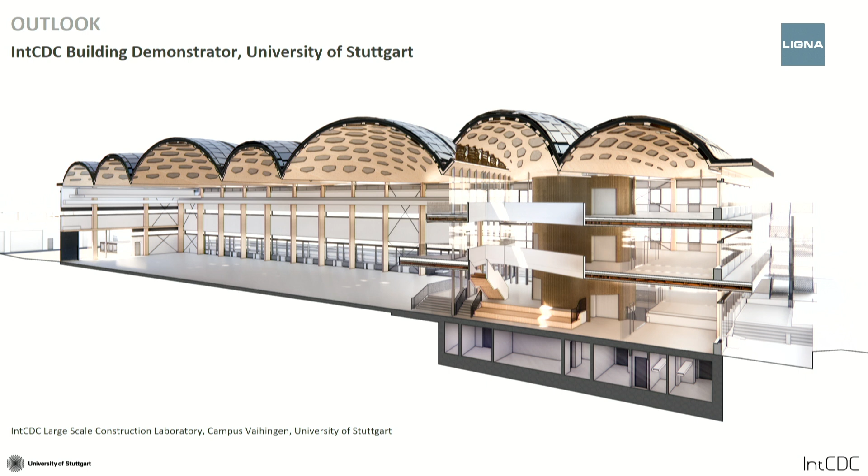In the multi-story part that you can see here on the right, we have the 11-meter span, we have the opportunity to have the irregular grid. We use all this for the quality of this particular building, and on top we have 3,500 square meters of the segmented timber shells. If I tell you that this is a public building, you will know that the budget is not exuberant. With that, I hope I was able to give you an idea of what true integration enabled by digital technologies for the timber construction sector may mean.